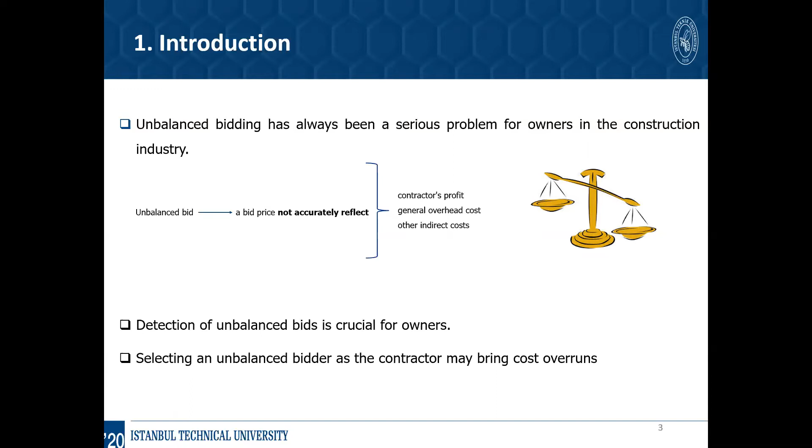There are 2 main categories of unbalanced bids. These are mathematical unbalanced bids and material unbalanced bids. We defined the mathematical unbalanced bid as one containing lump sum or unit bid items which do not reflect reasonable actual costs plus a reasonable proportionate share of the bidder's anticipated profits, overhead costs, and other indirect costs, which he/she anticipates for the performance of the items in question.

In other words, a bid is considered mathematically unbalanced if the prices of bid items are significantly overstated or understated when compared to owner's estimates or other bidders' prices. Having a mathematical unbalanced bid does not mean that it is unbalanced in a way that can increase the cost to the owner. At this point, the second type of unbalanced bid becomes the main topic of the conversation, which is materially unbalanced bid. If an owner doubts that a bid is mathematically unbalanced, the bid has to be examined in detail in order to determine whether it is also materially unbalanced.

We define the material unbalanced bid as follows: a bid is materially unbalanced if there is a reasonable doubt that award to the bidder submitting the mathematically unbalanced bid will result in the lowest ultimate cost to the government or any other owner. If the analysis of a mathematically unbalanced bid reveals that it may cost more money to the owner, then it is a material unbalanced bid. Also, it should be noted that a bid can be mathematically unbalanced but not materially unbalanced.

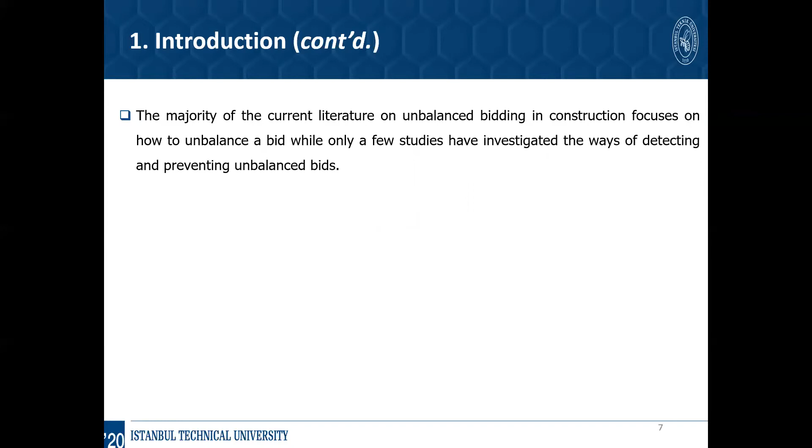The majority of the current literature on unbalanced bidding in construction focuses on how to unbalance a bid, while only a few have investigated the ways of detecting and preventing the unbalanced bids. We know that it is important to detect and prevent an unbalanced bid to eliminate its negative effects. Most of the studies focused on how to detect unbalanced bids intending to reject them. However, encouraging owners to reach a compromise between what they want and what bidder wants can provide mutual benefits to all parties. Therefore, in this study, we proposed an approach that prevents unbalanced bids instead of directly rejecting them.

It adjusts the submitted bids by using a parameter called counterbalance ratio, and it is calculated by dividing the bid price of the bidder by the adjusted bid price determined by Monte Carlo Simulation. The use of counterbalance ratio helps to counteract the effect of unacceptable unbalanced bids. The proposed approach is illustrated on an example from the literature to demonstrate the effectiveness of the proposed approach.

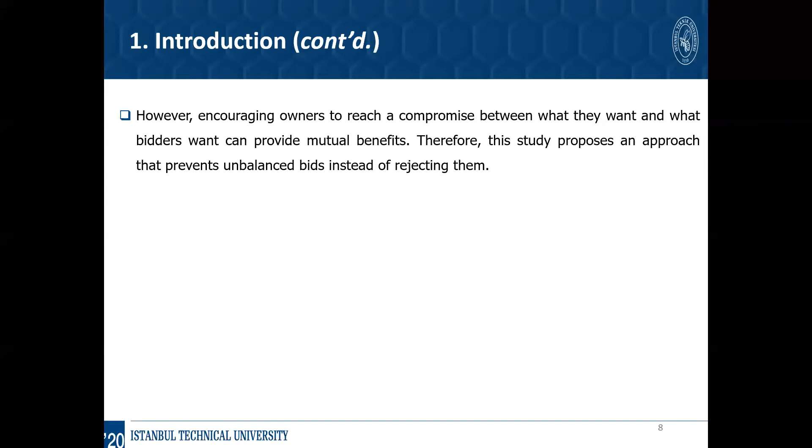The proposed model was developed through Visual Basic programming language integrated with Microsoft Excel. Using Visual Basic programming language helps the simulation process. And an Excel-based model was preferred because it is reliable and transparent through easy observation of the program's performance at every stage of the process. The proposed model mainly consists of 5 main steps, which are briefly explained in later slides.

The first step of the proposed model is the utilization of the Monte Carlo simulation to calculate the average unit prices of the bid items. The average unit price is used to adjust the unit price of every bid item submitted by each bidder. Previous models used arithmetic mean for this purpose.

However, there is a reason for using Monte Carlo simulation instead of using the arithmetic mean to calculate the average unit price of bid items, because the bid item prices may be skewed by several bidders. Therefore, using the arithmetic mean to calculate the average unit prices of bid items may not neutralize the negative effects of unbalanced bids. In addition to this, the bid item prices offered by different bidders are also estimates that increase the uncertainty inherent in the process.

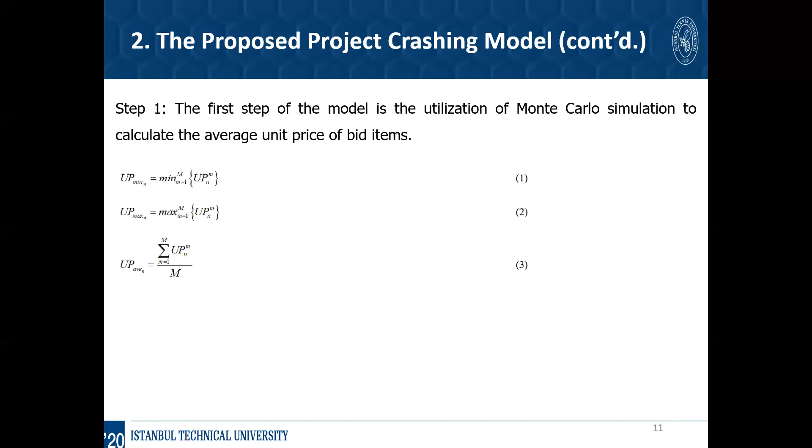In the second step, the Monte Carlo simulation generates random bid item prices based on the designated range of values and triangular distribution. This process is repeated for the number of iterations determined by the user. Thereafter, the Monte Carlo simulation provides a distribution of bid item prices. The arithmetic mean of the values of the bid item prices in this distribution is calculated in order to be used in the computation of the counterbalance ratio, as it is seen in equation 4.

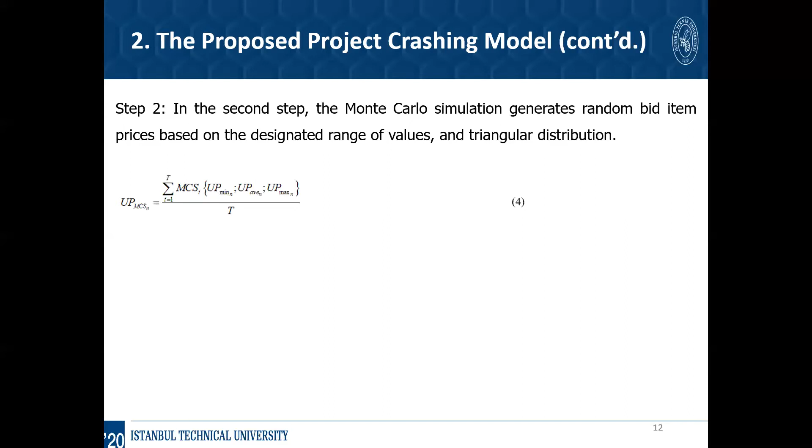The proposed model intends to stop excessive unbalancing by keeping it within reasonable limits. Therefore, it uses a counterbalance ratio to adjust the bid item prices submitted by each bidder. In the third step, in order to compute the counterbalance ratio, the total bid price of each bidder is divided by the adjusted bid price calculated using the average unit prices of each bid item obtained as a result of Monte Carlo simulation. In the fifth equation, we are multiplying the unit prices submitted by bidder M for item N with the quantity of item N. Then we are taking the sum of all item prices.

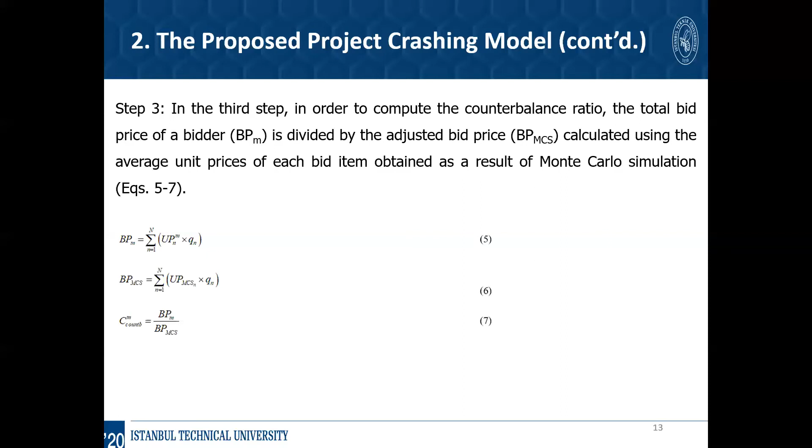In the sixth equation, we are multiplying the unit price derived by the Monte Carlo simulation for item N with the quantity of item N. Then we are taking the sum of all item prices again. In equation 7, we are dividing the total bid price submitted by bidders by the total bid price derived using the unit prices, which are also derived from Monte Carlo simulation. Eventually, we obtain a counterbalance ratio for each bidder.

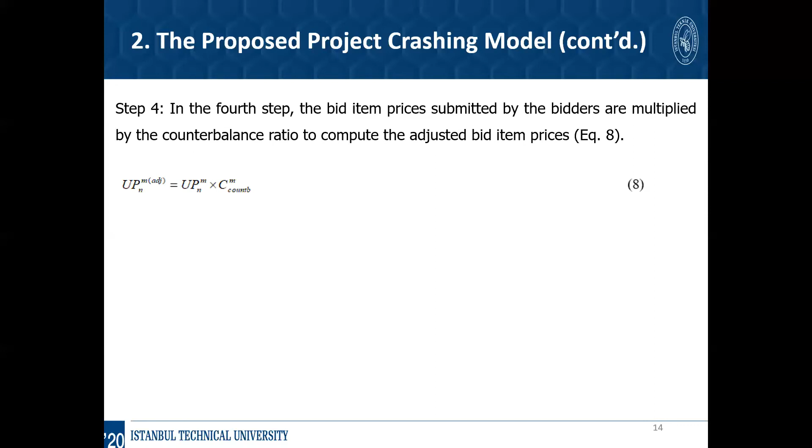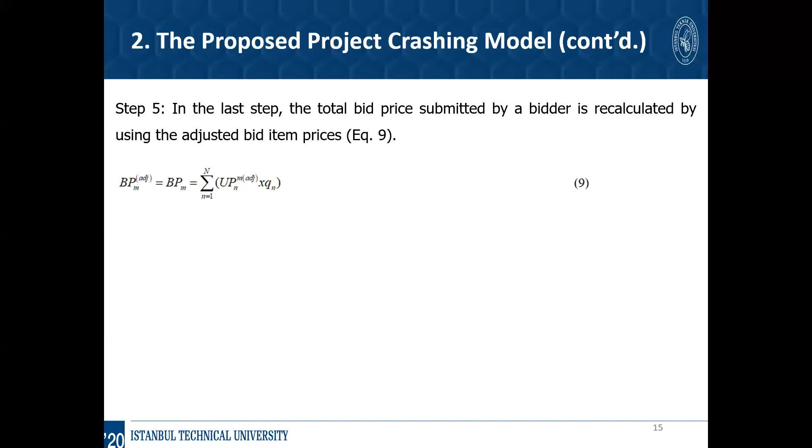In the fourth step, the bid item prices submitted by the bidders are multiplied by the counterbalance ratio to compute the adjusted bid item prices. Thus, the proposed model neutralizes negative impacts of manipulated bid items. In other words, the proposed model rebalances all the bids submitted by the bidders. In the last step, the total bid price submitted by a bidder is recalculated by using the adjusted bid item prices. The proposed model ensures that the total bid price of a bidder remains unchanged after adjusting the bid item prices. Thus, the nature of the competitive bidding is preserved.

Most of the previous unbalanced bid detection models reject unbalanced bids without considering the adjustment of bid item prices. However, the proposed model in this study adjusts the bid item prices instead of rejecting unbalanced bids. Thus, it protects the interest of owners. In addition, the proposed model preserves the total bid prices offered by a bidder to provide a fair competition environment.

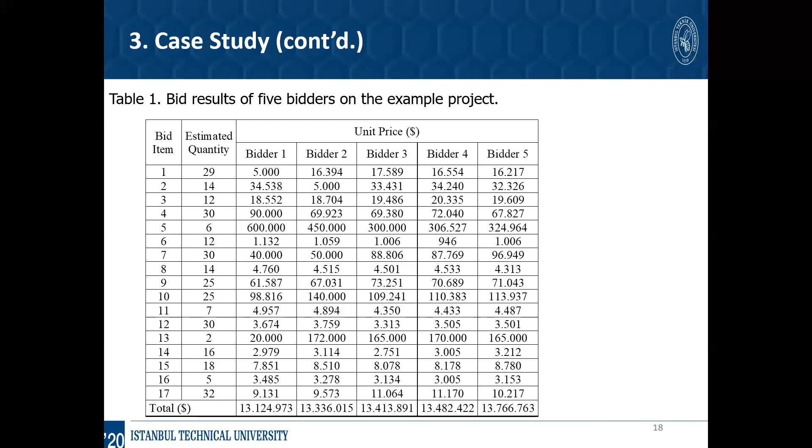Bidder 1 submitted the lowest total bid price. If one reviews the unit prices presented in Table 1, one will see that Bidder 1 submitted extremely low unit prices for bid items 1, 7, and 13, when compared to the unit prices of other bidders. On the other hand, Bidder 1 submitted extremely high unit prices for bid items 4 and 5, when we compared them to the unit prices of other bidders. The discrepancy generates a reasonable doubt that award to the Bidder 1 will result in the lowest legitimate cost to the owner.

In order to investigate this further, the steps explained in the previous section are followed to run Monte Carlo simulation for 5,000 iterations. In order to calculate the average price of the bid items, random bid item prices were generated at each iteration using minimum, most likely, and maximum values. The adjusted bid price is calculated using the average price of the bid items obtained from Monte Carlo simulation and the quantities estimated by the owner for the bid items.

After calculating the adjusted bid price, the bid price of each bidder is divided by it to compute the counterbalance ratio for each bidder. The counterbalance ratios and adjusted bid item prices of each bidder are presented in Table 2. The total bid price of each bidder is preserved unchanged even if the bid item prices are adjusted by counterbalance ratio, as it can be seen in Table 2.

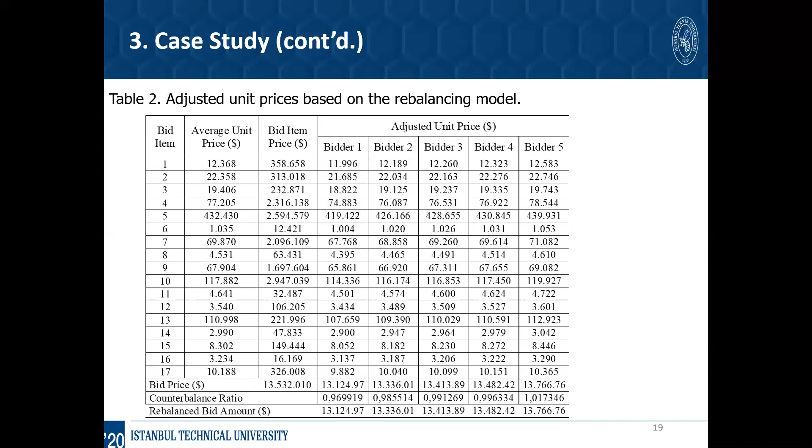The total bid prices are based on the estimated quantities. However, the actual quantities rarely match them. Therefore, the cost of the example project is also determined by multiplying the submitted bid item prices with the actual quantities identified during the construction, as it can be seen in Table 3.

Assuming that the lowest bidder, for this case it is Bidder 1 of course, is awarded, the findings reveal that the owner ends up paying $700,000 more than the submitted bid. It also should be noted that the lowest bidder becomes the second lowest bid when the actual quantities are considered.

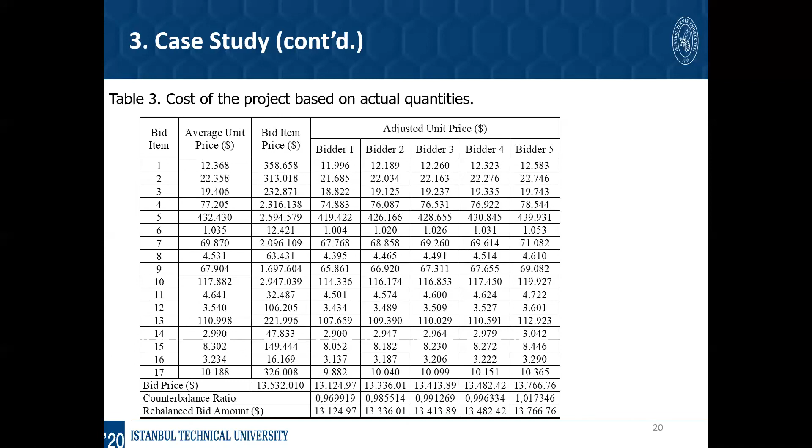After adjusting the unit prices by using the counterbalance ratio, the owner saves more than $13,000 when comparing the amount found by multiplying the actual quantities with the unadjusted bid item price, as it can be seen in Table 4. It should also be noted that after recalculating the bids using the actual quantities but the adjusted unit price proposed by the bidders, the original lowest bidder remains the lowest bidder, which is also quite important.

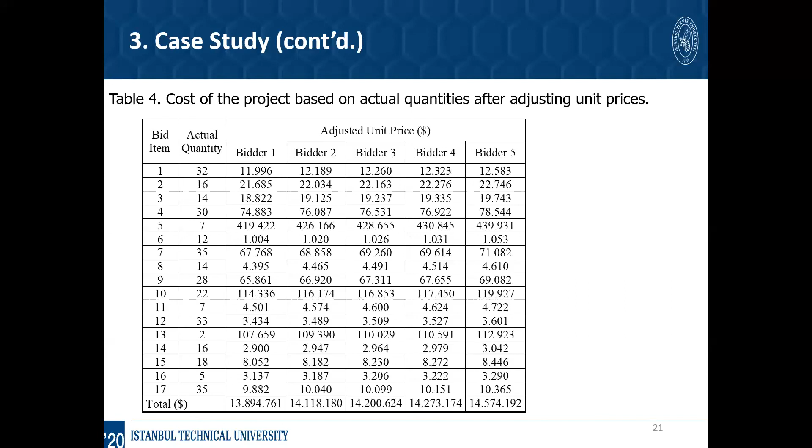Let me conclude our study. The detection and prevention of unbalanced bids is crucial for both owners and contractors to maintain a competitive environment. Even though owners tend to reject unbalanced bids, reaching a compromise between what owner wants and what bidders want can provide mutual benefits. For this purpose, an unbalanced bidding prevention model is presented in this study. The proposed model provides a procedure to prevent unbalanced bidding by rebalancing the bids rather than rejecting them.

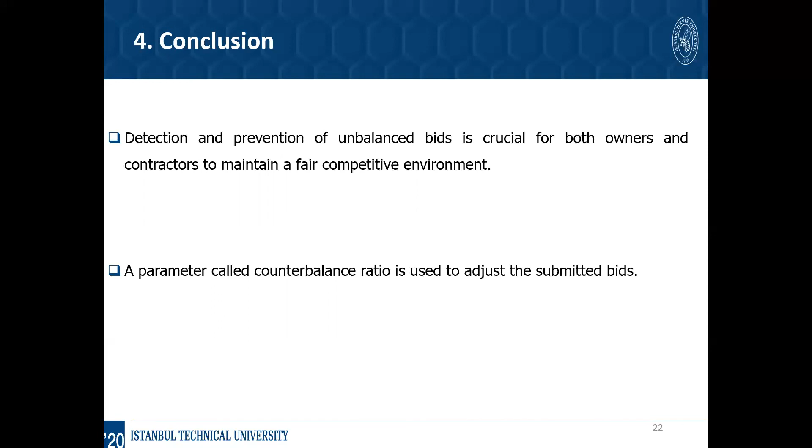A parameter called counterbalance ratio is used to adjust the submitted bids. The counterbalance ratio is computed by dividing the submitted bid price by the adjusted bid price determined by the Monte Carlo simulation. The use of counterbalance ratio does not change the total bid price submitted by the bidders, but it alters the bid item prices.

An example project from the literature is used to demonstrate the application of the proposed model. Indeed, the findings reveal that the model prevents unbalanced bids while keeping the original lowest bidder as the lowest bidder. It is also anticipated that the proposed approach will deter bidders from unbalancing their bids. However, the proposed model has a limitation as it does not consider the time value of the money. In addition, comparing the developed unbalanced bidding prevention model with alternative models can be explored in future research.